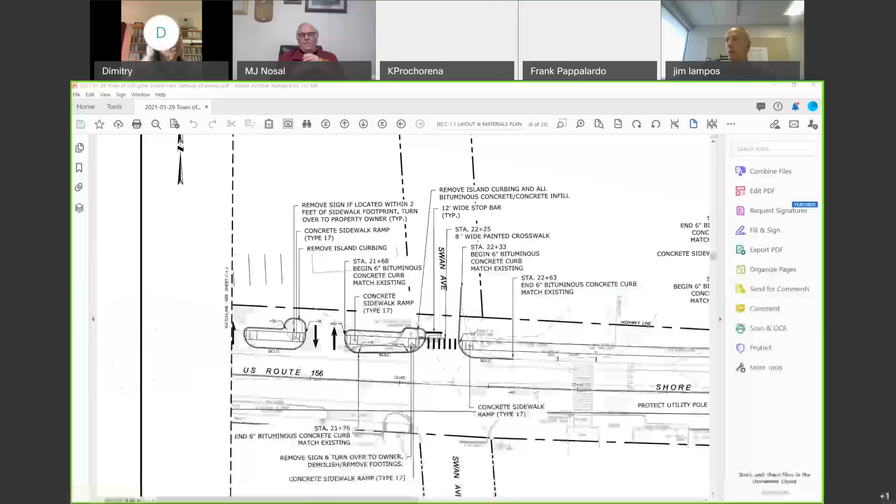Can everybody see that? Yeah. So here is Route 156, Swan Avenue, the proposed entrance and the other entrance over here. This is just the corner of the building that you can see here. This is the outline of the existing island, and this is the outline of the proposed island, and you can see this is the sidewalk essentially running through the middle of the island.

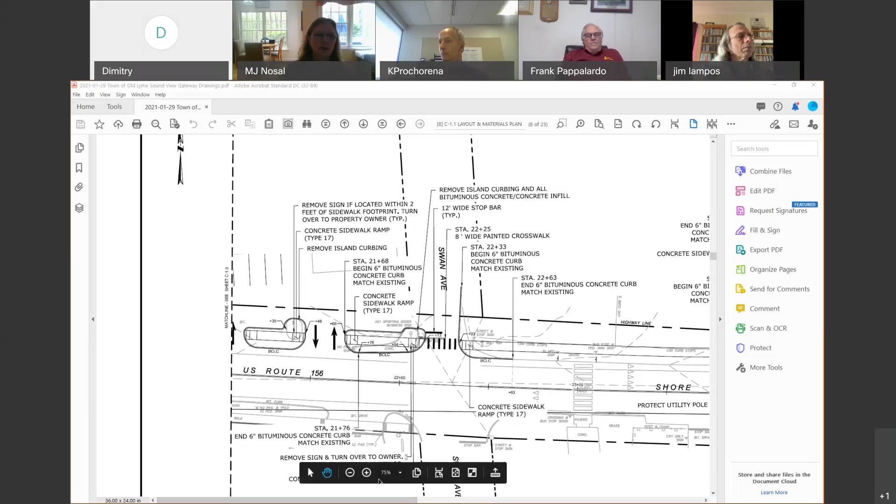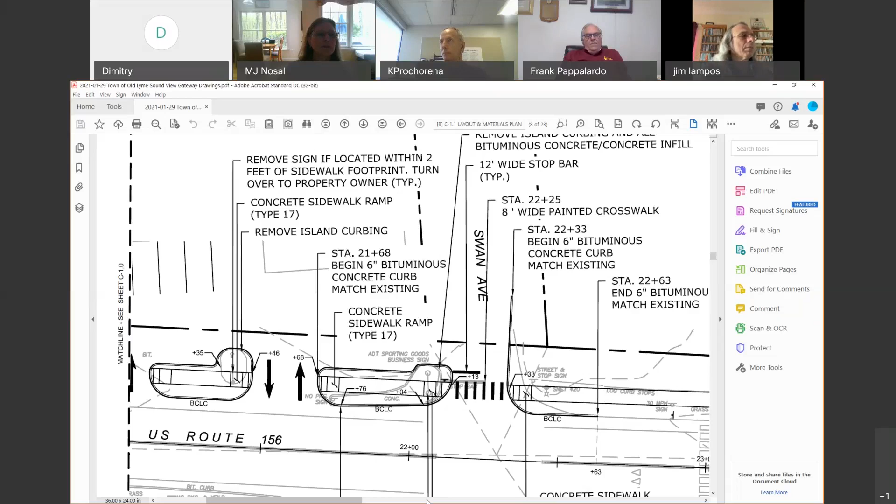We went over the specific concerns that Dimitri had as a committee. Does the committee have any thoughts before we turn it over to Dimitri to talk to us? I'd like to hear what he's proposing. Jim or Erik? I'd like to hear what Dimitri thinks, what direction we should take. Erik, any thoughts before we turn it over? No, Dimitri, go ahead.

All right, okay Dimitri. I thank you, Mary Jo, very much for giving me this opportunity to talk to you, committee members. I would say working hard.

I understand, I'm not against the sidewalk. What happened was in 1988 my sign was approved by the state of Connecticut and the town, and an island was put and a sign was installed. Since this time, many people who live here longer know that I used to have a hardware store by the name Old Lyme Hardware for 10 years, from 1988 to 1998.

At that time, when parking was occupied, people had difficulty with this island. Many people were crossing the island to get to the parking, especially on the east side. I have parking for 5 cars, including parking number 5 on the east side, handicap parking. With regular size cars, vans and small trucks coming to the hardware store, when 3-4 cars were occupying parking, it became very difficult to get around the island, especially cars going west on 156.

It's also potentially variable depending on the specific configuration of the parking on the property. For these older properties that are essentially non-conforming, it can get tricky at times, but all of the work that was designed is about the safety of pedestrians on the sidewalk. That's why the island is configured as such. If you notice... and I apologize, I stopped sharing, I'll re-share that. It's there to house the sidewalk. So as you can see here, we need something to house the sidewalk with the curbing, so there's a buffer between the pedestrian and motor vehicles. The only way to theoretically remove the island would be to remove the sidewalk, which is obviously not possible.

Hey Kurt, I have a quick question. The sidewalk across the street is in an area where people come when cars come out and cars come in. Also, having a sidewalk is not going to be a problem. But talking about safety, what's the safety going to do when cars cannot come in to the parking? So this is also a situation with trouble.

Jim, you were saying something? I just want to get a sense, it looks like the driveway throat is pretty consistent with what Dimitri has now, right? How much did he lose in terms of the width of his entry or his access from Shore Road? From the end of the existing island to the end of the new island, it's just about 5 feet, a little bit under 5 feet. And what do we have, 20 feet, 24 feet for that entire driveway? Yeah, the driveway is about 22 feet wide, 2 eleven-foot lanes.

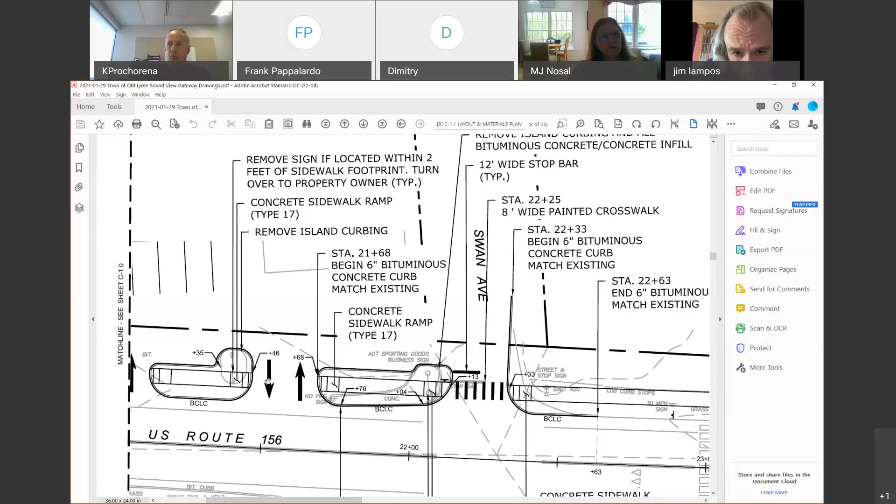Frank, do you mean only my property is affected, this direction? No, nobody else's property is affected. Dimitri, I'm asking the engineer the question, so let's get the answer first. Frank, do you mean in this direction, where I'm showing the cursor, to slide it this way a little bit? Slide it towards Swan Avenue, just slide it over towards Swan Avenue a little bit. Okay, I'm sorry, I thought... okay.

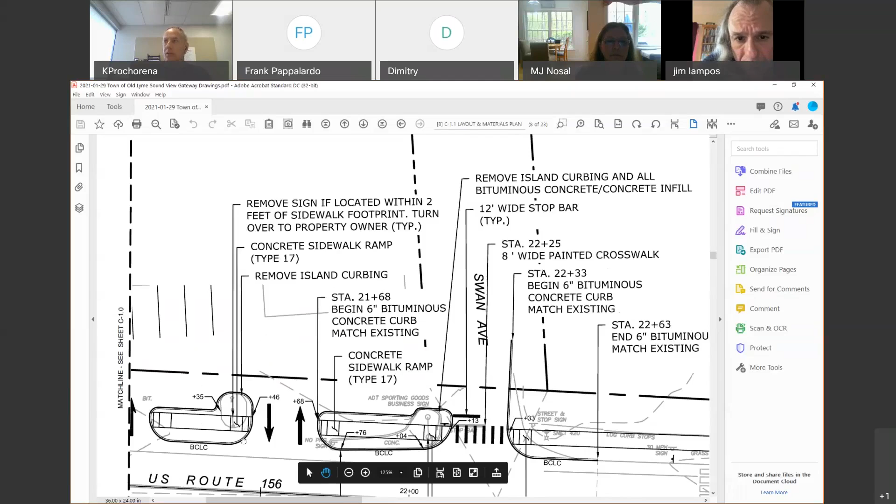In my opinion, that would make the turning movements more difficult, because ideally, especially if we think about a one-way circulation, we'd like to have vehicles come in at the end of the lot to give them as much flexibility as possible as they peel off into existing spaces. If we put it more near the center, we could increase the percentage of potential conflicts between vehicles coming into the property and vehicles doing their theoretical reverse 90-degree turning movement to exit. So having it towards this end, heading more towards the west end, is actually more beneficial as far as turning movements.

How about choking it down rather than opening it up? If we choked it down... yes, so there'd be more parking area to make the turn around once you're there, you know what I mean? Yeah, if we did the one-way, we could make the entrance smaller. With a two-way entrance, we probably would not want to do that because you could have a conflict between opposing vehicles, but if we made it one-way, we could make the throat of the opening smaller.

I don't agree with that, because the more you close the entrance, the more difficult it is to get to the parkings. It's very simple to understand that. You should open it more, not close it. You open it, it's easier to get to the parkings, because if there is no island, people can get to every parking with one 90-degree turn. If you close it more, then you have to make a 90-degree turn and then another opposite way 90-degree turn. How can you do this if you close it more? This is actually making the situation worse for me, not better. You should open more, not close more. This is completely against nature. I guess if you drive a car, you understand: you make one turn right, then a left turn to the parking. It's a 90-degree and 90-degree turn. You don't have space for that.

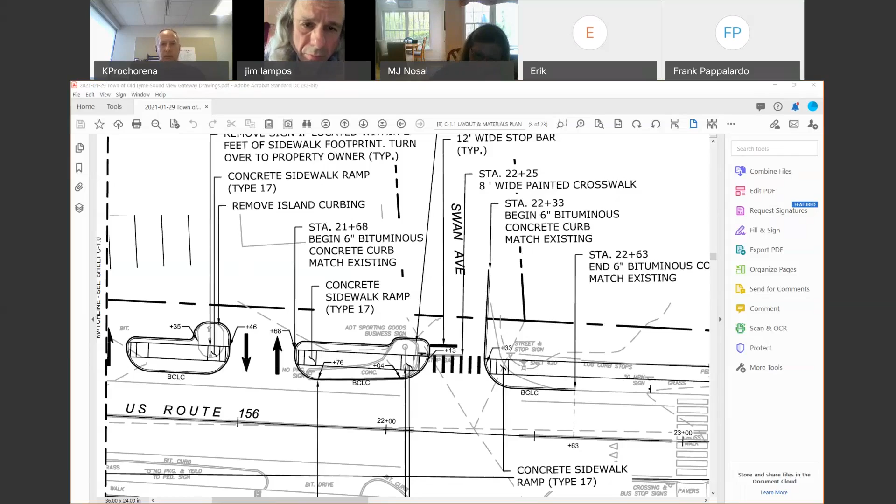I don't disagree, but I would not want to spend an inordinate amount of time on this, Kurt. It's a quick evaluation. If there's something that is possible, fine. If there's something that's not possible, that's it, we're done. Okay, yeah, and it should be a pretty quick exercise, I think. It's literally talking an hour between the two of us while working together.

Okay, appreciate that. Yes, Jim, sorry. I think we can lay to rest the changing of the driveway throat, the opening to Shore Road, because Dimitri doesn't want to see that reduced. So right, that would pretty much be the only option. So I think we can all agree that the driveway is what it is. Right, and Kurt doesn't have to waste time on that.

Yeah, and it's very clear. I mean, I talked with him today. I said, you have parking behind your building. And he said he could park his vehicles in the back. So he recognizes he has a lot more space in the back for his big vans, but his big van can easily get into space 1 and 2, as he calls it. Space 3, he had his Crown Vic or whatever it was there quite easily. For a regular car, I mean, I know I could get in there, and I told him that today. The 5th parking spot, which he calls his handicapped spot, I don't believe it's to code anyway. So I don't think we are affecting his livelihood by instituting these safety parameters for Shore Road.

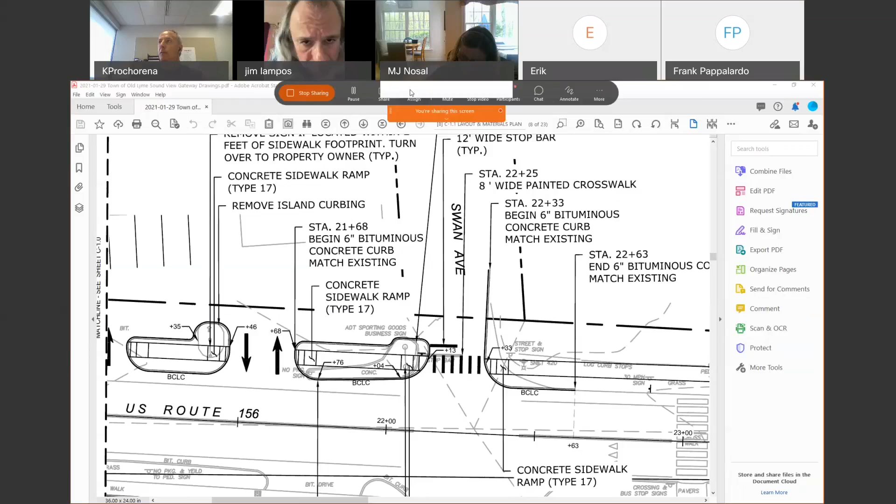They are essentially in the early stages of work out on Route 156 right now. They're working at the intersection of 156 and Cross Lane. So they're moving along pretty well in there.

Today we were there for a little while and just watched them working. Things were going fine. They have a police detail secured for the work on Shore Road, which is great, so that was nice from a traffic control standpoint.

DOT made a visit to the project site since they are working out on Shore Road, and the contractor confirmed that all was well. DOT was okay with what they saw related to traffic patterns and work, which was wonderful to hear. They're working from that direction and will proceed eastward, and once they get their system down, they should move with a pretty high level of efficiency. They felt, based on the meeting today, that they were on schedule for that May 28th date, so that was good to hear.

One question that's come up is the pricing on the decorative posts. That request got sent at least two weeks ago now. The contractor confirmed he reached out to the supplier, but there was a question related to the breakaway base. I sent him some supplemental information today, and I had warned him about that because we had the same issue on the previous Hartford Avenue project. He was reluctant to give us pricing until he resolves that breakaway base issue, so I'm hoping we'll get that in the next couple of days.

I guess we should ask the owners too. So here's the area, and I'll blow it up a little bit. As you can see, these were the trees that came out. You can see how close these two were, actually in the sidewalk, and these are so close - the root zone is about equal to the drip line of a tree.

So you could see that about 50% of the roots were cut. And anyway, the one issue with creating what I'll call a crash barrier or vehicle barrier is that this is the DOT right-of-way line, or the highway line. I suspect that rocks are not considered by DOT a viable traffic barrier, because if a vehicle hits a rock, it's not designed to attenuate a crash like a metal beam rail is.

So if rocks are proposed as an option, I suspect they would not be able to be placed within the highway line, or what we sometimes call the clear zone. If we are proposing something on DOT's property, I suspect DOT would say they're okay with putting it in, but it has to be fully compliant with their standards for a vehicle barrier system. And I'm happy to have that conversation with DOT if you'd like.

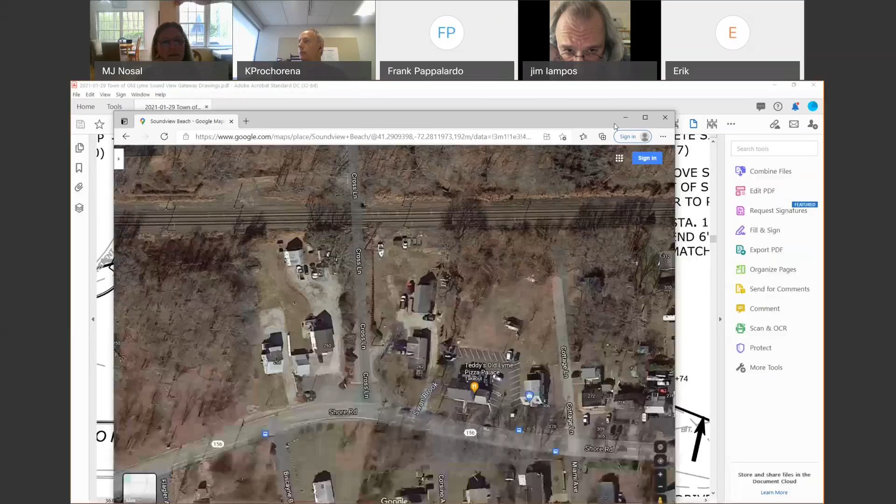So in fact, if it's helpful, the highway line is back here approximately, about where my cursor is. Got it, so right there.

Yeah, that's helpful. But I think what we should do is respond back to his email and just say, hey, this is what we discussed, this is what we're thinking - we could do rocks or boulders, whatever, but it would have to be further back because of DOT regulations. And see what they have to say about it before we spend too much time running around. They may not want that. Who knows, right?

Right. And Kurt, then if we would end up with proposing a guardrail, that could be on the DOT property then?

Because it would be on the DOT property, it would have to meet all of their design standards for guardrail, which are very well defined. They have standard sheets since they're used so commonly, and it's all based on federal highway crash testing. There are different configurations and end treatments - sometimes the guardrail tapers down flush with the ground, sometimes there's a curled end, and sometimes a blunt end with black and yellow hatching. Each configuration is specific to a certain design speed and roadway type. We could work with DOT to find out exactly what they wanted, since it's such a common, well-defined standard.

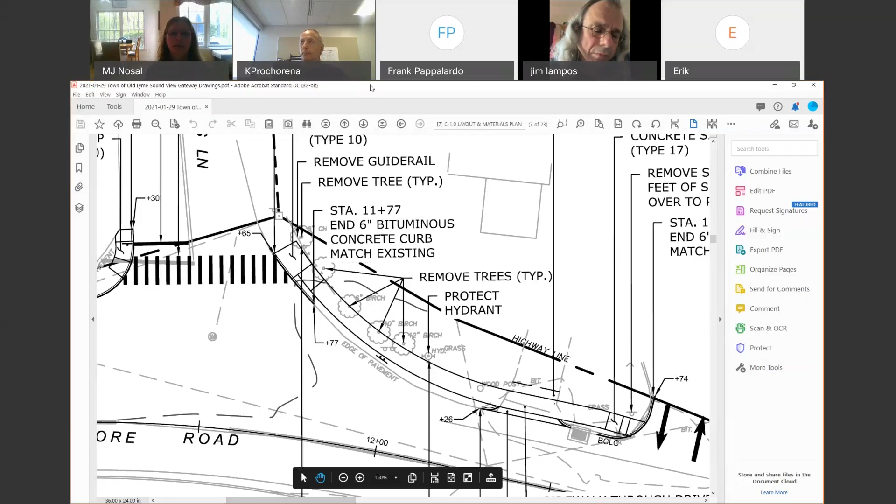Thank you. Moving right along to Teddy's - Teddy does want the Jersey barrier, as you know. Dan Levesque is supposed to get us the information on that today. Ted is aware this would be temporary while construction is going on. But he requested today that instead of the grass buffer, it be filled with stone, because he doesn't want any maintenance and doesn't want to water out there. He understands why we need the buffer, but he doesn't want grass.

So I have to bring that up to see if you're all right with that before we do a change order, which I don't know how involved that would be, Kurt. It's actually pretty simple - we'd have to get DOT's approval to make a change, but that's a phone call or an email. Then it's simply, by email, I ask Dan for a quick, very simple sketch, ask him for a price proposal to change from loam and seed to whatever type of rock we choose. He'll do the quantity and submit the price proposal for the committee's consideration.